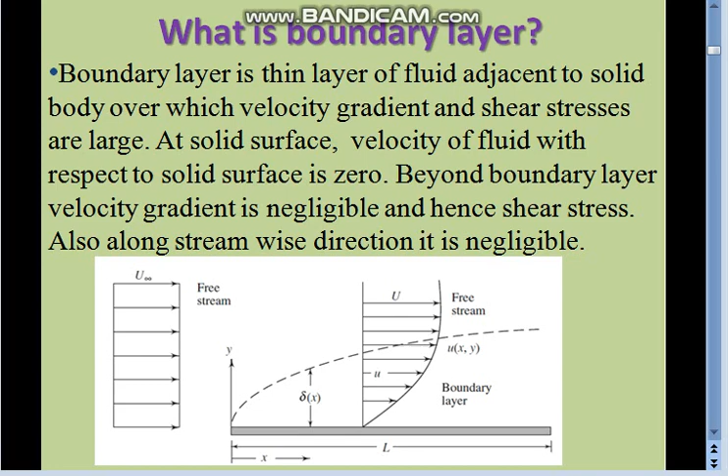Now we will see the different regions in the boundary layer. Unlike the flow in a pipe, where either there exists laminar flow in the tube or pipe, or there exists turbulent flow, in case of flow over the surface of a body, initially in the initial length of the body there exists laminar flow, then it transits, and in the later length it goes to the turbulent range, or it becomes turbulent.

So if you see this diagram, at the start, when the flow is coming from the left hand side with the free stream velocity u infinity, the boundary layer starts growing, its thickness goes on increasing. First it becomes laminar, and at xc it starts to begin turbulent.

The point where it starts to become turbulent is the critical Reynolds number, and this critical Reynolds number is of the order 5 into 10 raised to 5. Then it becomes initially in transition, it goes in transition, then it becomes turbulent.

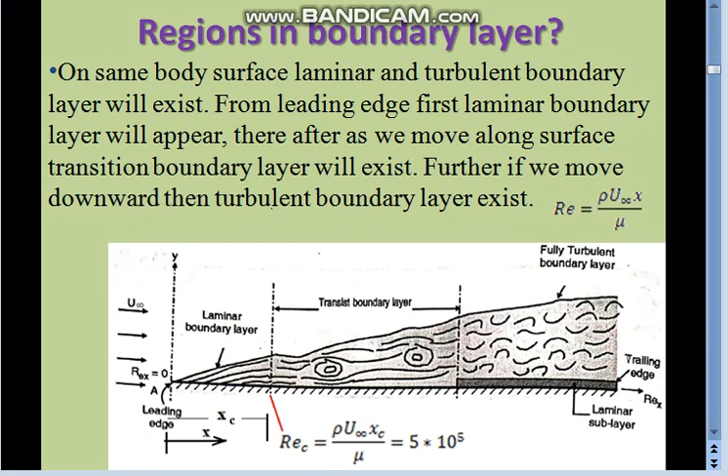Here the Reynolds number is specified based on its location from the leading edge. So we calculate distance x from the leading edge at any given point. Suppose at point xc, if I calculate Reynolds number, it will be rho u infinity xc by mu. This is how we calculate the Reynolds number.

So Reynolds number at each point goes on changing from the leading edge towards the right hand side, at the end that is called the trailing edge. At the leading edge Reynolds number is 0, then it goes on increasing based on the x location of that point on the surface.

So the Reynolds number where it starts converting from laminar to turbulent is called the critical Reynolds number, and typically this critical Reynolds number is 5 into 10 raised to 5.

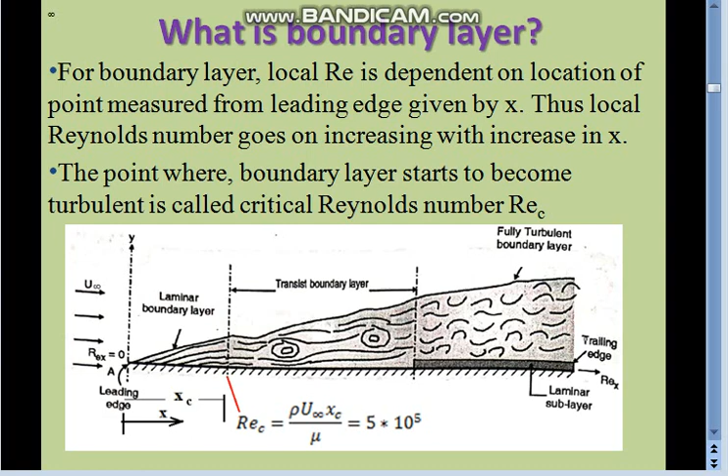In the study of flow over immersed bodies, our attention is mostly on the boundary layer. Why? Because in this boundary layer there exists a velocity gradient, and velocity gradient gives rise to what is called shear stress. We know Newton's law of viscosity.

Shear stress is mu du by dy. So shear stress will exist if there is du by dy, velocity gradient, and viscosity. If either of these two is absent, there will not be any shear stress. In this boundary layer there exists a velocity gradient, and it is a fluid having this viscosity. The shear stress is obvious, but beyond this, the velocity gradient outside the boundary layer is negligible.

So our attention is on the boundary layer to find the shear stress, and from the shear stress to find the shear force, that will give us the drag force.

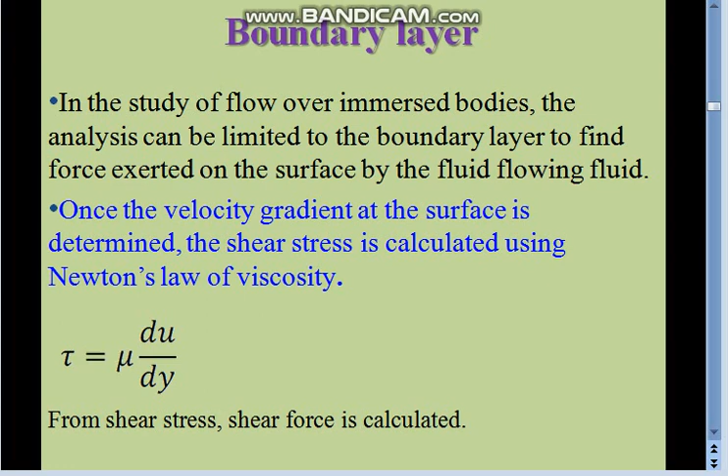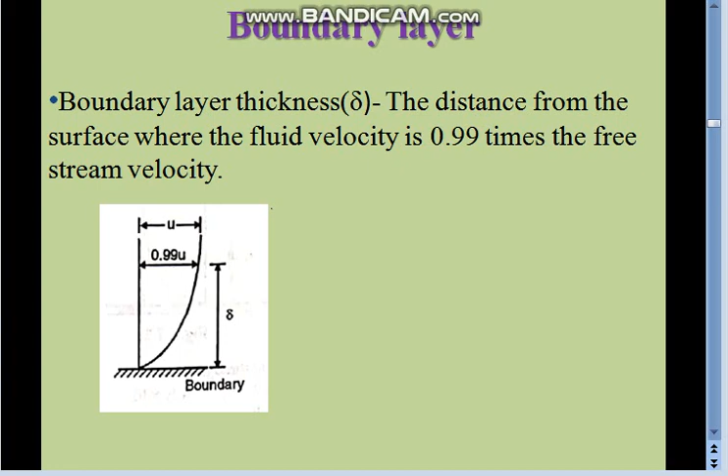So let us understand one concept called boundary layer thickness. It is basically given by the letter delta. It is the distance from the surface of the wall where the fluid velocity becomes 99%, or 0.99 times, the free stream velocity. That thickness is an imaginary thickness, we cannot see this. This distance is called the boundary layer thickness.

Now let us see how the velocity changes at the laminar boundary layer and the turbulent boundary layer. If you see the graph, on the y-axis it is the normalized distance from the wall divided by the boundary layer thickness, and on the other axis, local velocity divided by free stream velocity.

If you see the laminar boundary layer, when you take change of velocity divided by y, you will find that for the laminar boundary layer the velocity gradient is less as compared to the turbulent boundary layer, where the velocity gradient is large. And we can say that shear stress in case of laminar boundary layer is less than shear stress in the turbulent boundary layer.

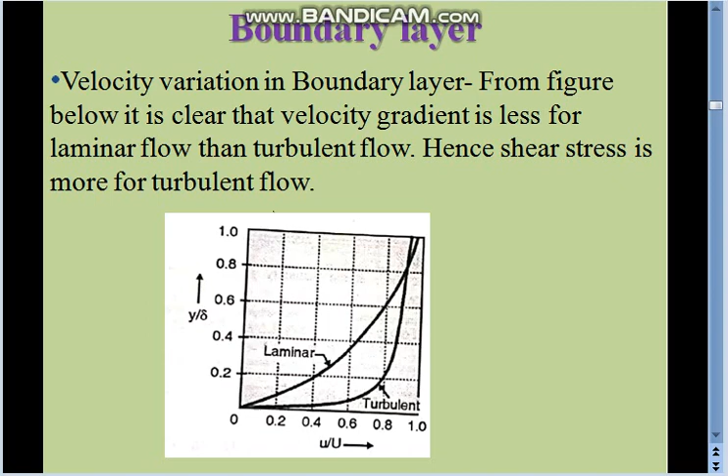Now we'll understand how the boundary layer thickness goes on increasing, what parameters affect the boundary layer growth. First parameter is the distance from the leading edge, that is x. More we move away from the leading edge, more will be the thickness of the boundary layer.

Second thing, free stream velocity u infinity. If the free stream velocity increases, boundary layer thickness decreases, and vice versa. So if the free stream velocity decreases, boundary layer thickness will increase.

Next parameter, viscosity of the fluid, mu. If more is the viscosity of the fluid, more will be the thickness of the boundary layer. Next parameter, density of the fluid, rho. Lower the density of the fluid, more is the boundary layer thickness. Or we can say, more the density of the fluid, less is the boundary layer thickness.

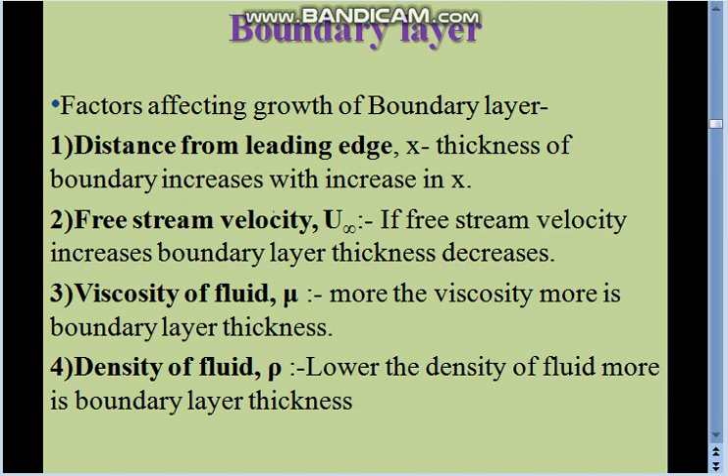So we can say for u infinity and rho it is inversely proportional, and for x and mu it is directly proportional.

Now let us concentrate on a topic called the separation of the boundary layer. It is a very important point, because when there is flow separation, it leads to additional drag on the system, as well as it will reduce the lift force on the wing. So it is essential to understand the boundary layer separation.

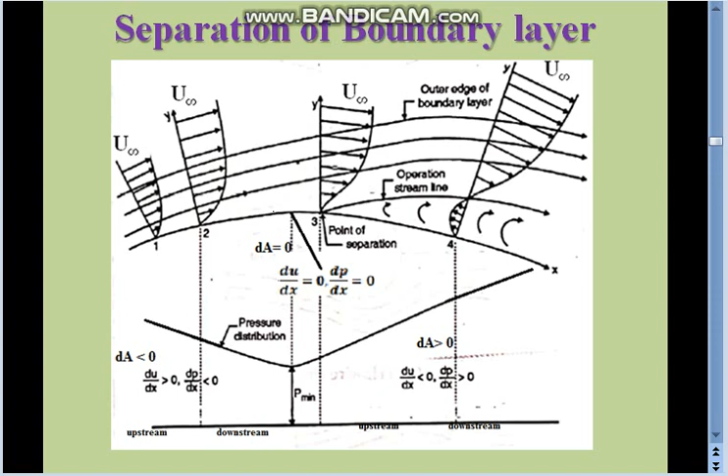So it is the adverse pressure gradient, and because of this adverse pressure gradient, the fluid near the wall will get decelerated, and there will come a point where there is start of flow separation, shown at point 3. After the start of flow separation, further there will be flow separation, and because of this there will be additional drag or reduction of lift force.

Now let us again go back to the converging section. In the converging section, dA is negative, meaning area is decreasing. So velocity is increasing. As per Bernoulli's theorem, pressure will decrease. So upstream pressure is higher and downstream pressure is lower. We know that flow should always go from higher pressure to lower pressure. So it is the favorable pressure gradient, and therefore there are no chances of flow separation in the converging section.

In the converging section, upstream pressure is greater and downstream pressure is less. So you always see that du by dy in the vertical direction near the wall is positive, meaning velocity change moving away from the wall is positive. So du by dy is positive, there is no flow separation, and the boundary layer is attached to the wall. So in this converging passage, there is no question of flow separation.

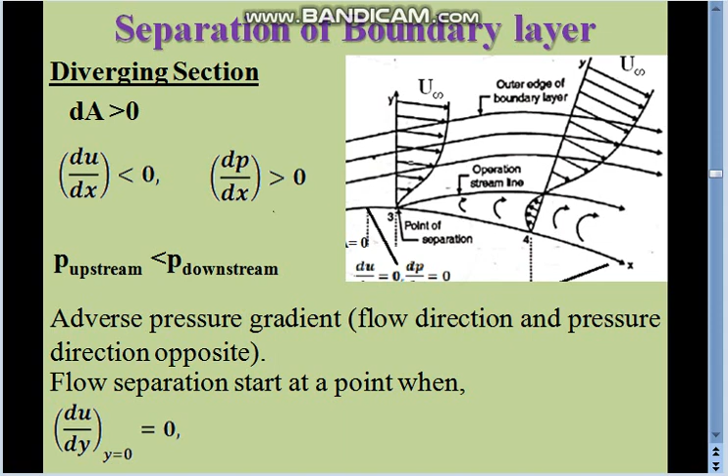Now let us move to the diverging section. What is happening here? Area is increasing, dA is greater than 0. What will happen to the velocity? From the continuity equation, velocity will reduce. As velocity is reducing, from Bernoulli's theorem, pressure will go on increasing. It means that downstream pressure is greater than upstream pressure. So downstream pressure is bigger, upstream pressure is lesser.

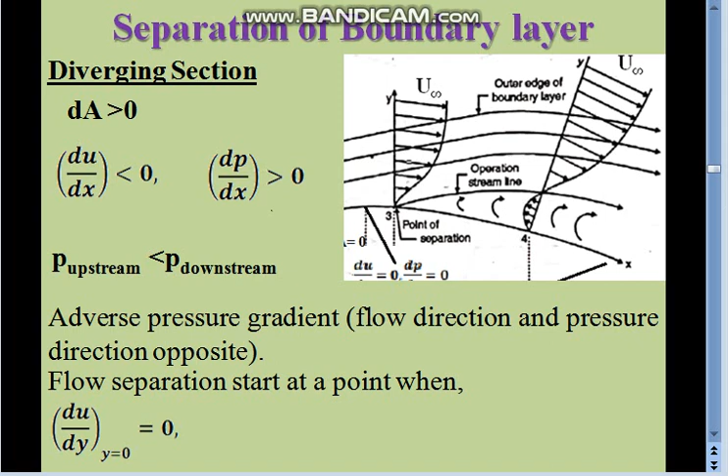So the opposite net force by this pressure will decelerate the flow near the wall, and a point will come, like point 3, where it will start separating. When the flow starts separating, du by dy at the wall will become 0, and after that it will start separating. This occurs due to the adverse pressure gradient, as the net pressure force opposes the motion of the fluid near the wall, and in the separated flow region the flow gets reversed. That's why we get du by dy at the wall as negative, less than 0.

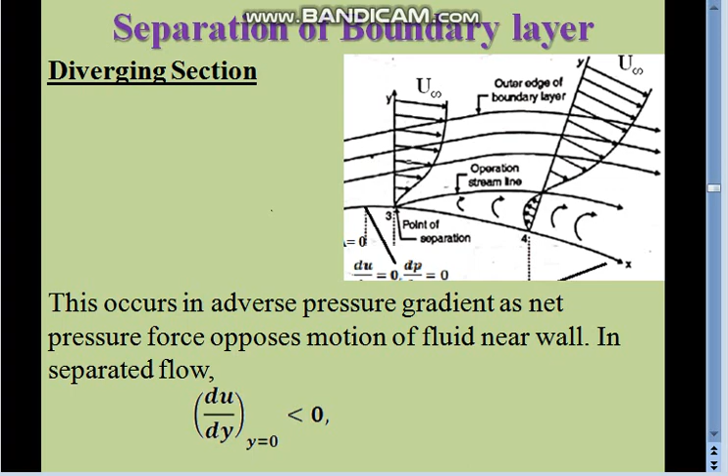So as I mentioned, flow separation is a bad effect in fluid mechanics, and care should be taken to avoid this, because it increases drag and reduces lift force. So as this flow separation is undesirable, causing an increase in drag or decrease in lift force, we need to control this.

Now we'll see how to control flow separation. First is to design the body to match the streamlines. Streamlines are imaginary lines, such that flow will not cross the streamline. So when you plot streamlines in CFD, if you see the absence of the streamline in a particular area, and there is a gap existing between your body and the streamline, then you have to match your body shape to the streamline. If you do this, you can avoid flow separation, or achieve boundary layer suppression. So that is streamlining the body. This is the first way to avoid or shift the location of flow separation more towards the downstream side.

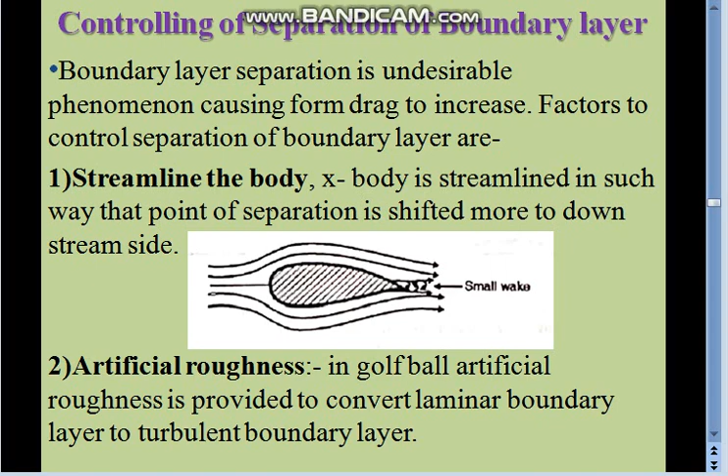Second way is to provide artificial roughness, like in a golf ball. Artificial roughness is provided to convert the laminar boundary layer to a turbulent boundary layer, and to shift the point of flow separation more towards the downstream side.

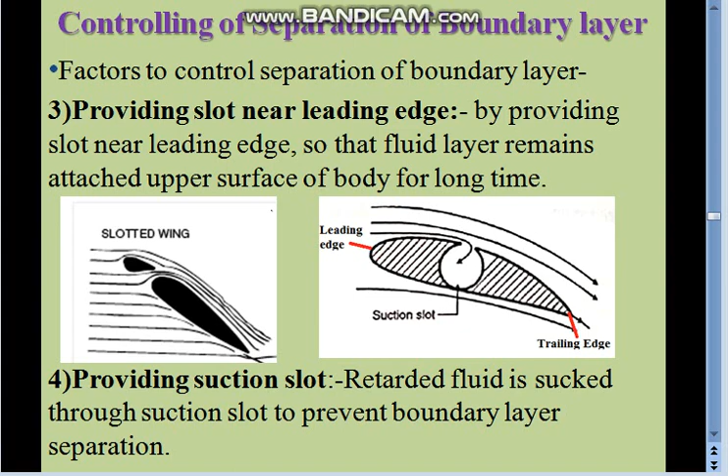Next is providing a suction slot. The retarded fluid is sucked into the suction slot, so that the layer above the retarded or slow fluid layer, which has more velocity, will come in contact with the wall, and it will delay the boundary layer separation.

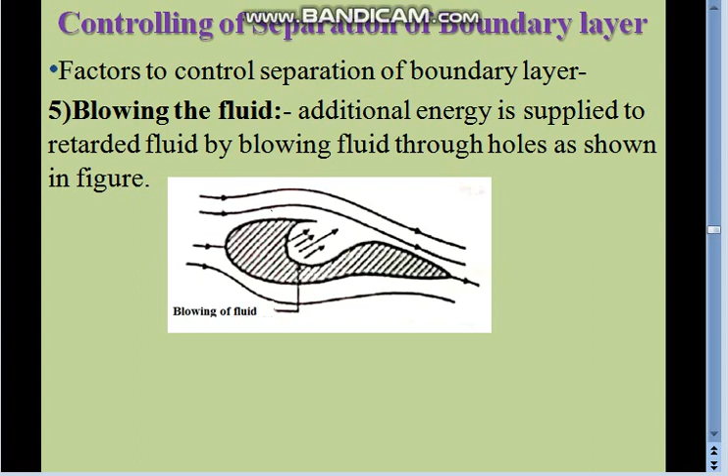Next one is blowing the fluid. So we can blow air into the boundary layer, so that it can give energy to the retarded fluid, and it can avoid the boundary layer separation. So these are all the methods that are generally adopted to avoid flow separation.

Hello friends, now we will see the governing equation for the boundary layer. We know the governing equations for fluid mechanics: one is the continuity equation and the other is the momentum equation. So there will be one continuity equation and three momentum equations.

The momentum equation is a consequence of Newton's second law of motion, that is, mass into acceleration is the summation of forces. So why are there three momentum equations? Because force is a vector quantity, and we need to describe the force in the x direction, y direction, and z direction. Now if you see the boundary layer, it is basically a two-dimensional phenomenon, and along z the variation is negligible, so basically it is a two-dimensional flow.

Now again in the governing equation, if you consider incompressible flow and two-dimensional flow, then we get the equations: one continuity equation and two momentum equations, in the x and y direction. X is along the length, and y is perpendicular to that.

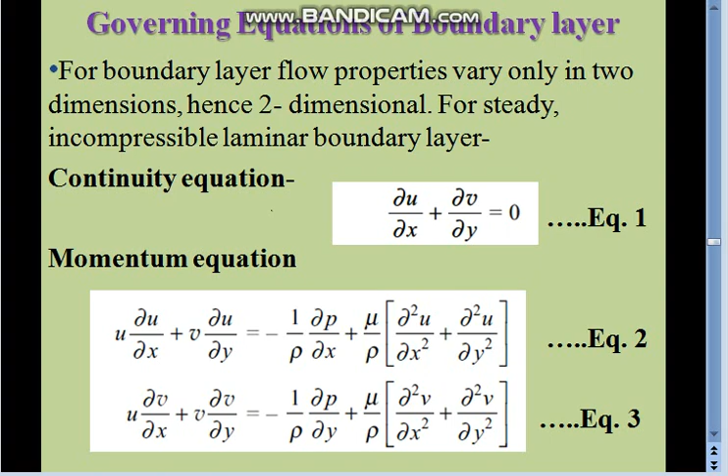Now boundary layer theory simplifies these governing equations. Let us see how we simplify this equation.

If you see the boundary layer, it is already described that boundary layer is very small as compared to the length of the plate. So for the small thickness, the variation of pressure across the boundary layer is very small, so we can say dp by dy equals 0. Also, as boundary layer thickness is very small, the pressure in the boundary layer is the same as the pressure just outside it. So along the length, dp by dx, the pressure gradient, is dp infinity by dx, meaning whatever the pressure gradient is outside the boundary layer, it is the same.

So u varies perpendicular to the plate across the thickness of the boundary layer, but its variation along the length is small. Del u by del x is small, but if you take the derivative of del u by del x, it becomes very small, so we can say it is negligible. So del square u by del x square is 0.

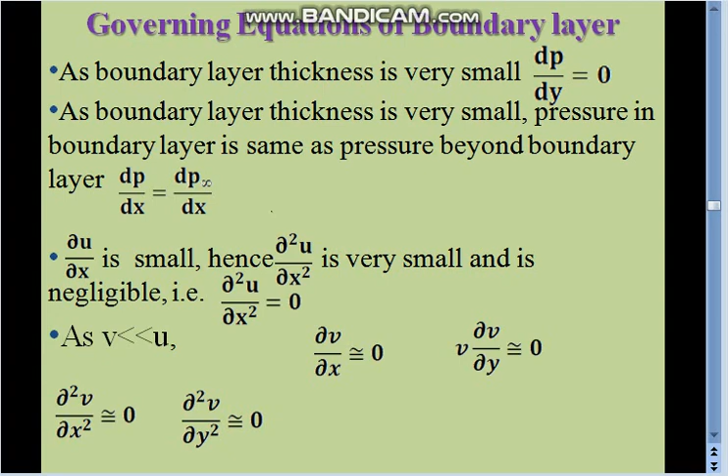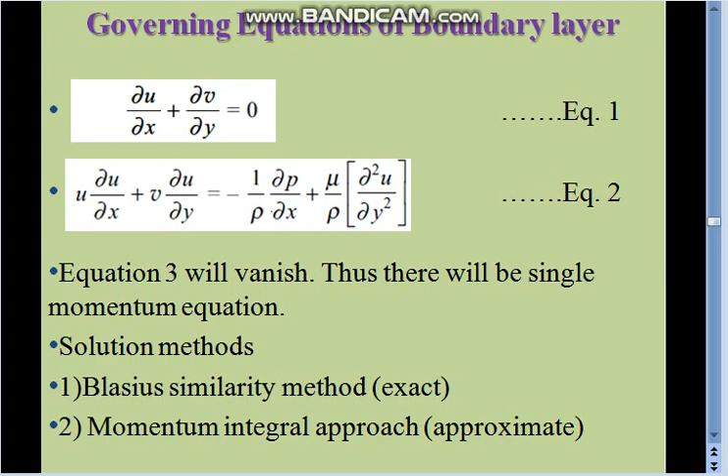So how to solve this momentum equation? There are two methods. One is the exact method by Blasius, also called the Blasius similarity method. Another method is the momentum integral method, which is approximate. Now here we'll see the momentum integral equation, which is approximate. So what do we do here?

The 2-dimensional incompressible boundary layer equation, which was simplified, is integrated over the boundary layer thickness. Once we integrate this, we get one equation called the von Karman integral equation: d by dx, integral from 0 to delta of u by u infinity times 1 minus u by u infinity dy, equals integral from 0 to delta of 1 by rho times dp infinity by dx dy, plus tau w by rho u infinity square.

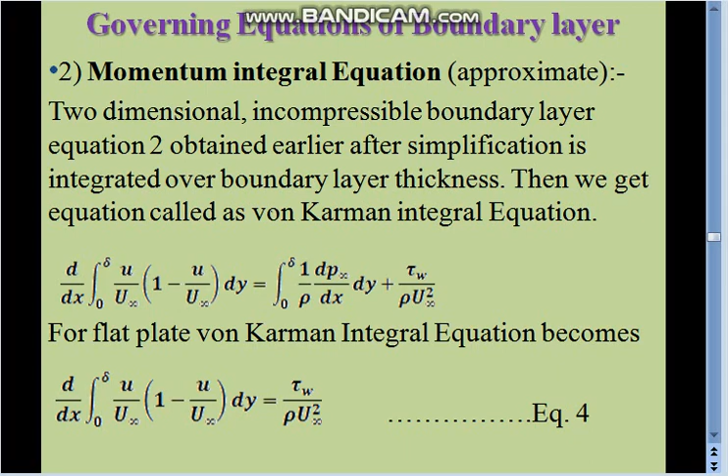For the flat plate, this von Karman integral equation becomes simplified where the pressure variation becomes 0, as the flow is not converging or diverging. So we get the von Karman equation as d by dx, integral from 0 to delta of u by u infinity times 1 minus u by u infinity dy, equals tau w by rho u infinity square. This is the equation we got, called the momentum integral equation for the flat plate. This is equation number 4.

Now to solve equation number 4, we need the knowledge of the velocity profile, that is u by u infinity. So what we do is assume some profile, like a cubic polynomial. If we assume the cubic polynomial velocity profile, for example, u by u infinity equals c0 plus c1 times y by delta plus c2 times y by delta square plus c3 times y by delta cube. So we assume this velocity profile.

Now we can get c0, c1, c2, c3 based on the boundary conditions we apply to the equation. Once we apply the boundary conditions, the velocity distribution becomes u by u infinity equals 3 by 2 times y by delta minus 1 by 2 times y by delta cube. This is equation 5.

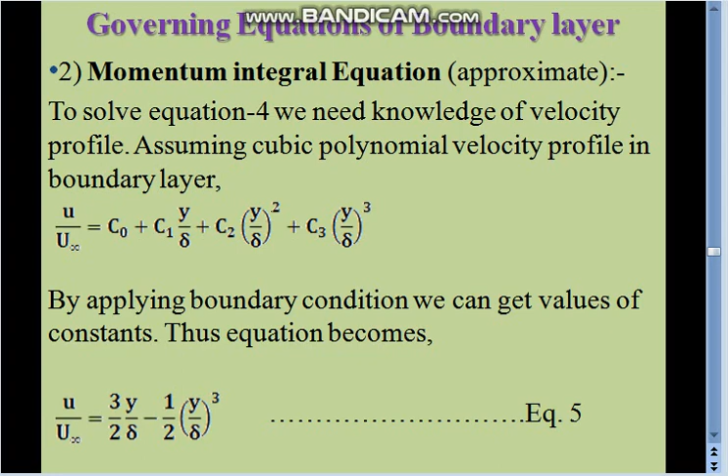Now we put this velocity profile into the von Karman equation. Putting equation 5 into the von Karman equation, after doing the mathematical treatment, we get the equation for boundary layer thickness as delta by x equals 4.64 divided by the square root of RE, where RE is the local Reynolds number, rho u infinity x by mu. So we can see that the boundary layer thickness is proportional to the square root of x. Please understand, what we are seeing here is the laminar boundary layer.

Similarly, we can prove that shear stress tau w is equal to 0.323 rho u infinity square divided by square root of RE. So in short, shear stress is inversely proportional to the square root of x, where x is the distance of that point from the leading edge.

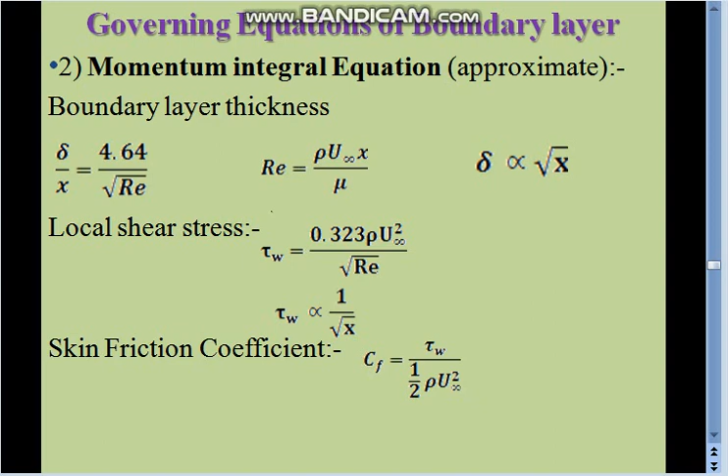Similarly, we can find the skin friction coefficient CF, which equals tau w by half rho u infinity square. After putting the value, CF becomes 0.646 divided by square root of RE. So in short, the skin friction coefficient is inversely proportional to the square root of x.

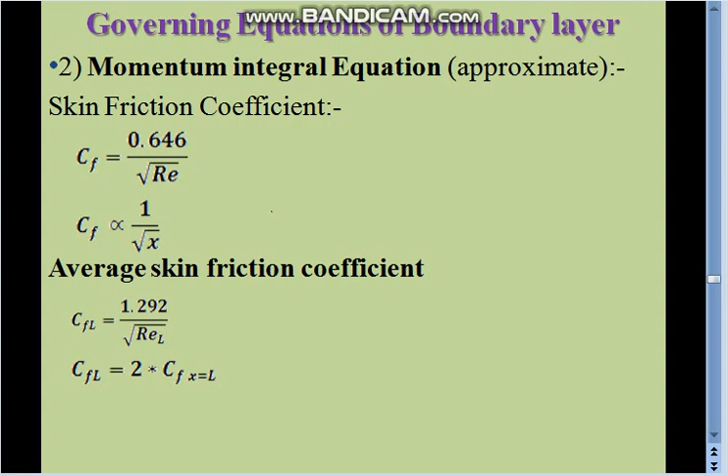So this is the local skin friction. For finding the average skin friction over the length, that is CFL, it equals 1.292 divided by square root of REL, where Reynolds number is rho u infinity capital L divided by mu. So here we conclude that the average skin friction is twice the local skin friction for the laminar boundary layer.

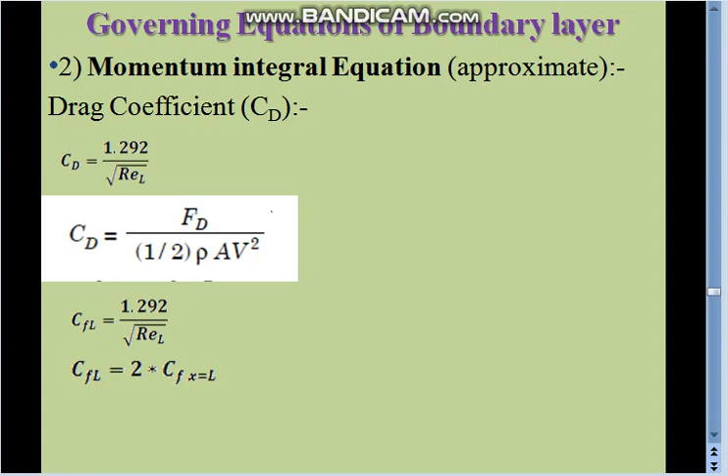Now whatever is the skin friction coefficient, it is the same, we call it the drag coefficient. So basically the value of drag coefficient will be 1.292 divided by square root of REL. How do we define the drag coefficient? Drag force divided by half rho A v square, where v is u infinity here. So this is about drag coefficient for laminar flow.

Now I'll move to the turbulent boundary layer profile. Basically the turbulent boundary layer profile is logarithmic. If you see the velocity profile, u by u infinity is given by y by delta raised to 1 by n, where n is 7 if Reynolds number is less than 10 raised to 7, and if it is between 10 raised to 7 to 10 raised to 8, n is 8.

If Reynolds number is between 10 raised to 8 to 10 raised to 9, n equals 9. So here in the turbulent boundary layer, the boundary layer thickness is given by delta by x equals 0.37 RE raised to 1 by 5. So here delta is proportional to x raised to 4 by 5.

X raised to 4 by 5 means delta is proportional to x raised to 0.8. In laminar flow, delta is proportional to x raised to 0.5, but here delta is proportional to x raised to 0.8. So the growth of the boundary layer is faster in the turbulent boundary layer.

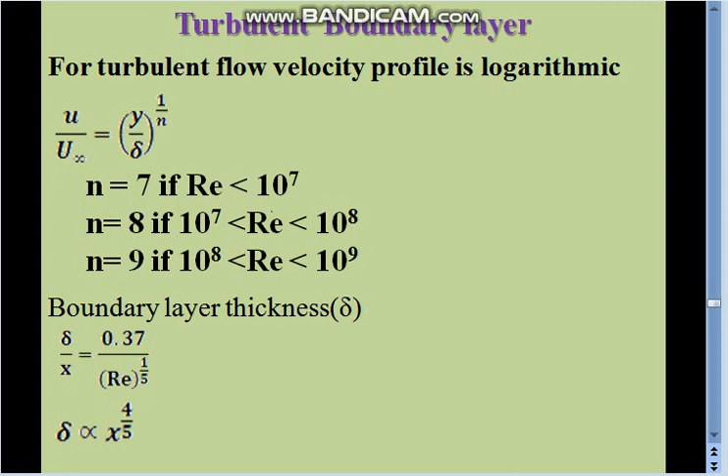Skin friction coefficient here is proportional to 1 by x raised to 1 by 5. Similarly, the total drag coefficient CD is given by 0.072 RE raised to 1 by 5.

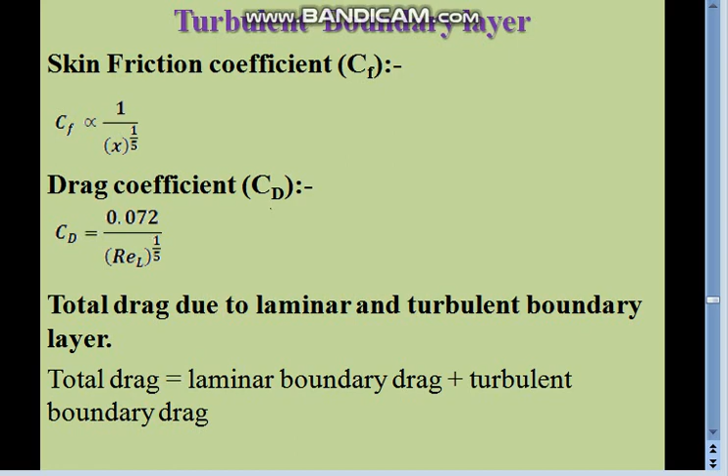So the obvious question that will come to mind is how to find the total drag force on the plate. What we have to do is find the drag force because of the laminar boundary layer, and then add the drag force because of the turbulent boundary layer, so we can get the total drag because of both boundary layers.

Let us see the difference between the laminar boundary layer and turbulent boundary layer. In the laminar boundary layer, thickness delta is proportional to x raised to 0.5, and in case of turbulent boundary layer, delta is proportional to x raised to 4 by 5, that is 0.8. So boundary layer growth is faster in the turbulent boundary layer.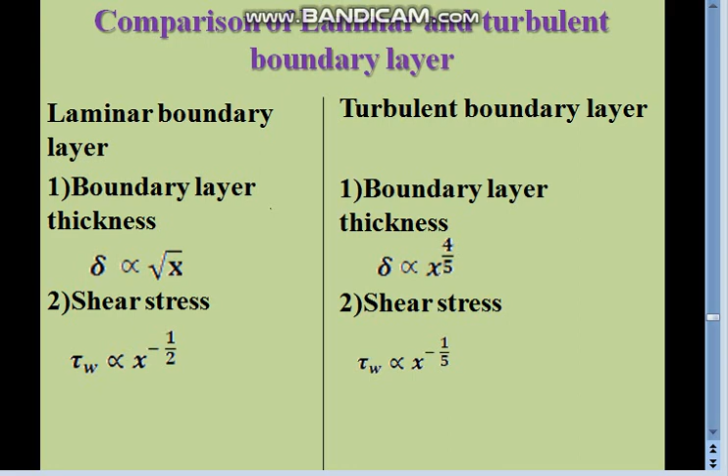Now compare the shear stress. Shear stress is inversely proportional to x raised to 0.5 in laminar flow, whereas in turbulent flow, shear stress is inversely proportional to x raised to 0.2. So we can see that shear stress is more in the turbulent boundary layer as compared to the laminar boundary layer.

Now we will see one important concept that is called displacement thickness. It is given by delta, del star.

So it is the distance by which the boundary layer will be displaced in a frictionless flow to give the same mass flow rate as that with the boundary layer flow. What is happening is because of viscosity near the wall, the velocity is 0 on the wall, and then it gradually increases. So you can see the average velocity in the boundary layer is less than what is beyond the boundary layer.

Now, somewhat it is blocking the flow, and how do we know how much it has blocked the flow? The concept we use is displacement thickness. In a frictionless or inviscid flow, we know that beyond the boundary layer the velocity gradient is very small, and though viscosity is there, the net effect is that shear stress is negligible, so it is as if the flow is inviscid.

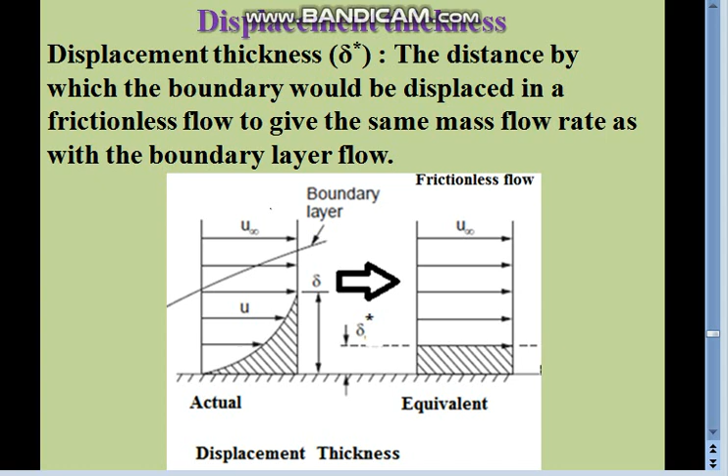Now there is an equation to calculate the displacement thickness. Delta star is given by the integration from 0 to delta of 1 minus u by u infinity, dy. From this equation we can find delta star. In this equation, the velocity profile will be given in terms of y by delta, where y is the distance from the wall and delta is the boundary layer thickness.

For example, in one problem it is given that u by u infinity equals y by delta. You just put y by delta in place of u by u infinity, and then integrate. You will get delta star, the displacement thickness, and at the end you will get the relation between delta star and delta. Such problems are asked in exams.

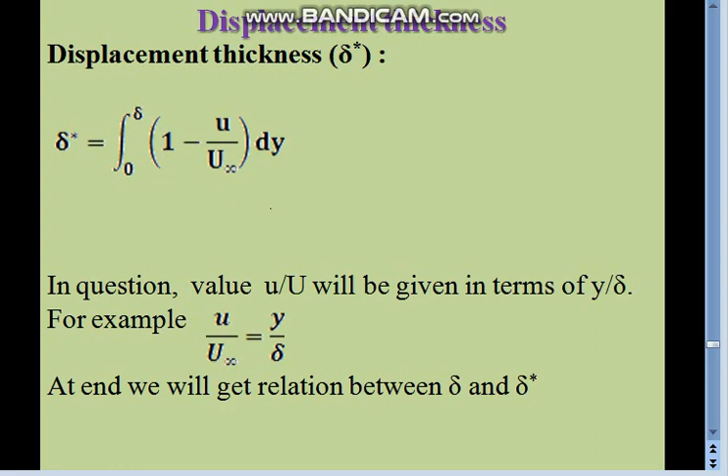Now I'll move to the next definition, that is momentum thickness. It is the distance by which the boundary will move from bottom to top. How are we moving the boundary from bottom to top? Because it is creating blockage, by that distance the wall will shift upward, in the inviscid flow.

We are considering that above, after displacing, whatever flow is above the wall will be inviscid flow - the distance through which the wall will displace upward to compensate the reduction of momentum due to the presence of the boundary layer. That is called momentum thickness, theta, indicated by theta.

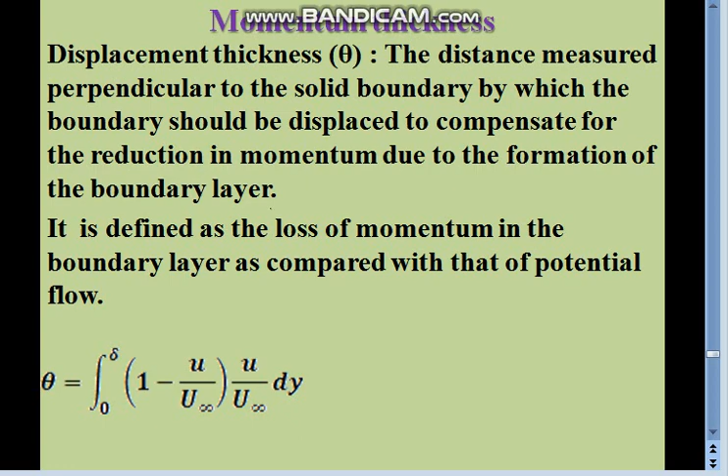So to compensate for the loss, we are moving the boundary layer wall in the inviscid flow, by a distance that compensates the loss of momentum, so as to have the same momentum in the boundary layer as in the inviscid flow. So we get the equation for theta, the momentum thickness: integral 0 to delta of 1 minus u by u infinity, into u by u infinity, dy. That is the momentum thickness.

Now we'll move to energy thickness, given by delta star star. It is the same way - as if we are replacing the boundary layer by inviscid flow. To have the same kinetic energy, how much distance will the wall move from bottom toward the top for the inviscid flow? That is the energy thickness, indicated by delta star star.

So delta star star is given by the equation: integral 0 to delta of 1 minus u squared divided by u infinity squared, into u by u infinity, dy. You simply use this equation - put the value of u by u infinity into this equation, integrate, and you will get the relation between the given parameter and delta. It is very simple.

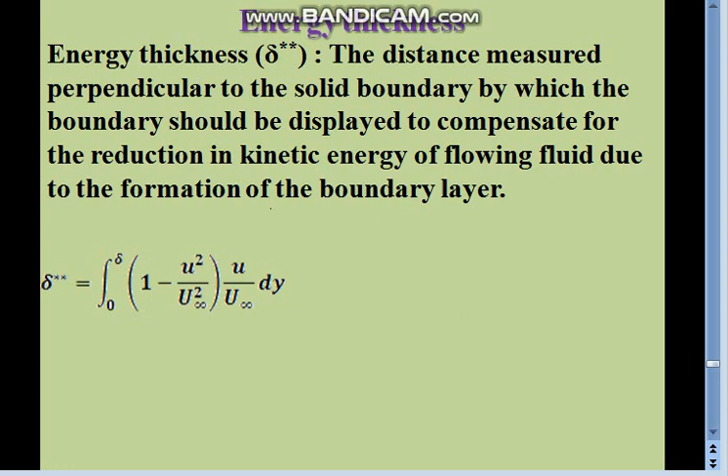Now we'll move to the next topic, shape factor, indicated by capital H. It is the ratio of displacement thickness to momentum thickness - shape factor H is the ratio of displacement thickness delta star to momentum thickness theta.

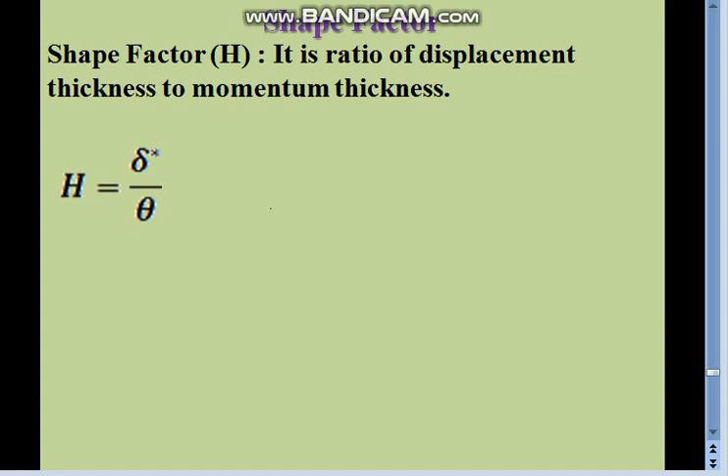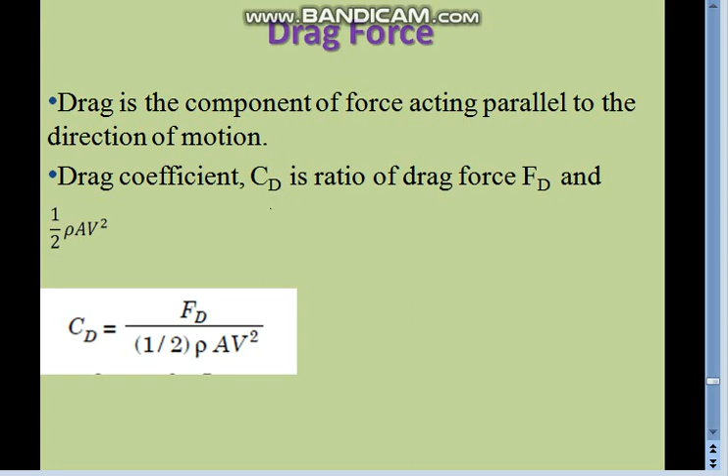Now we'll move to the next topic called drag force. Drag is a force component acting parallel to the direction of motion. We generally express drag force in terms of the drag coefficient, which is the drag force divided by half rho A v squared.

Similar to drag force, there is lift force. Lift force is the component of force acting perpendicular to the direction of motion. It is very important in the case of aircraft - our aim is to increase lift force and reduce drag force. Similar to the drag coefficient, there is the lift coefficient CL, given by the lift force divided by half rho A v squared.